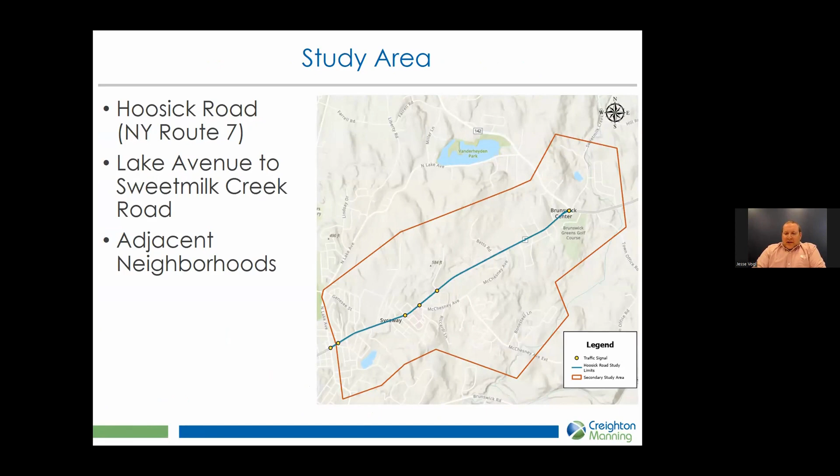We'll start here by taking a look at the study area. You can see in blue, our primary focus is the Hoosick Road Corridor, which is also New York Route 7, from Lake Avenue in the city of Troy to Sweetmilk Creek Road in the town of Brunswick. Also shown in red, we're looking at the adjacent neighborhoods to account for any potential spillover effects.

Here's the draft study purpose that was developed with the project team and study advisory committee. The purpose is generally to reduce traffic congestion, improve safety, and improve multi-modal mobility within the study area.

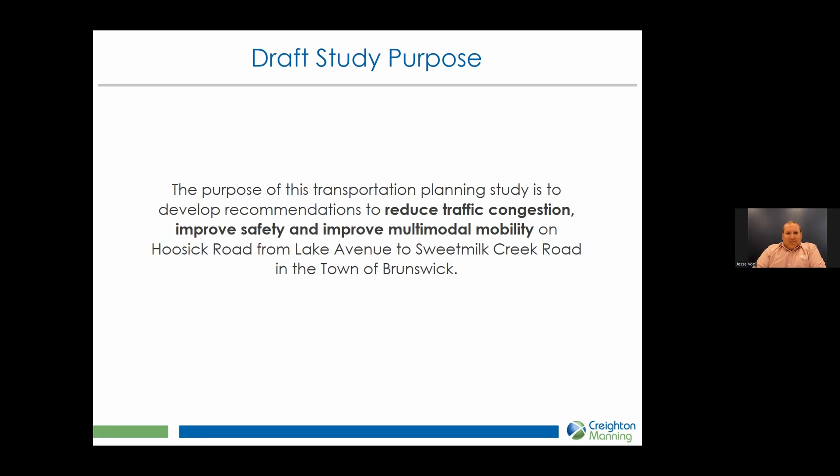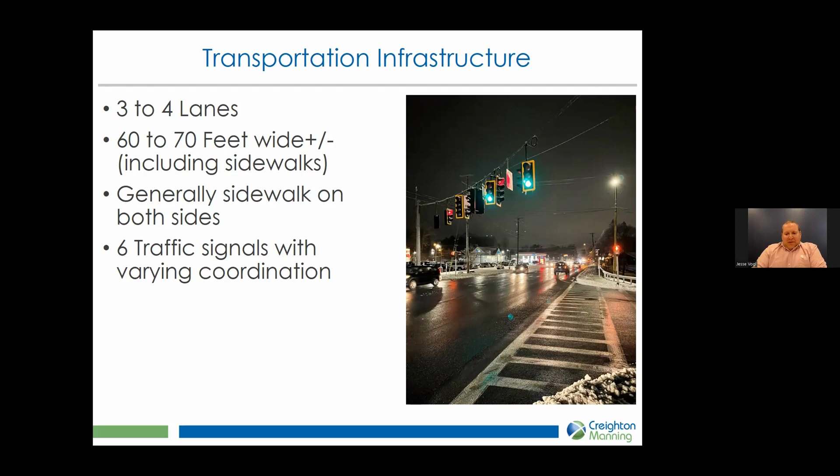Relative to Hoosick Road itself, it's 3 to 4 lanes, depending on where you are in the corridor, and ranges from 60 to 70 feet wide, including the sidewalks, which are generally present on both sides of the road. There are 6 traffic signals in the study area, and they have varying coordination parameters, meaning that they are timed to correspond to each other.

We conducted traffic counts for a week-long period on Hoosick Road in December to get an idea of when traffic was heaviest, to use in our modeling. We had 3 locations where we took counts, and Friday volumes were typically the highest, followed by weekdays.

The data also showed that traffic is heaviest in the western portion of the corridor and generally declines as you move to the east. Taking a closer look at the data we collected, we wanted to see what times of day had the highest traffic volumes.

Traffic generally increases around 6 a.m. and then stays relatively flat throughout the midday. Weekday traffic peaks in the early afternoon around 4 p.m., while Friday traffic peaks a bit earlier around noon.

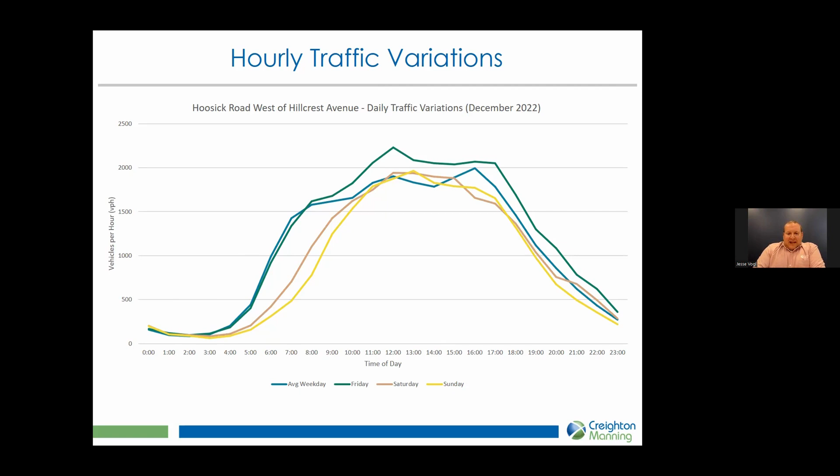This informed our future data collection of when we went and conducted intersection turning movement counts that fed our traffic model. Once we calibrated our existing traffic model, we then forecast traffic volumes to the year 2045 to account for potential growth.

We took a look at historic traffic trends, which showed that traffic has generally increased over the past decade. We coordinated with CDTC using their regional traffic model to develop background growth rate, and also accounted for any known and potential retail and residential developments that would affect traffic in the corridor to develop our 2045 traffic volumes that we use to model our future year.

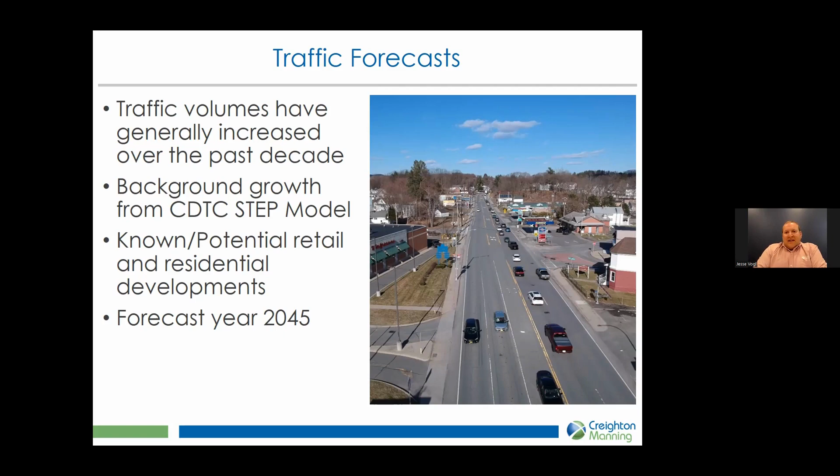We used that model to develop vehicle level of service, a letter grade from A to F that corresponds to how much delay drivers typically experience at an intersection. Levels of service A and B have less delay, while C and D are moderate, and E and F are long delays.

You can see on the right an image of the corridor showing the intersections with their delay. The color on the left shows the overall intersection operations, meaning every single approach, while the color on the right shows some of the side street or turning movement approaches.

You can see that the intersections on the western portion of the corridor generally have higher overall delays, while almost all intersections have some approaches operating at level of service E and F, whether it's the side street or a turning movement.

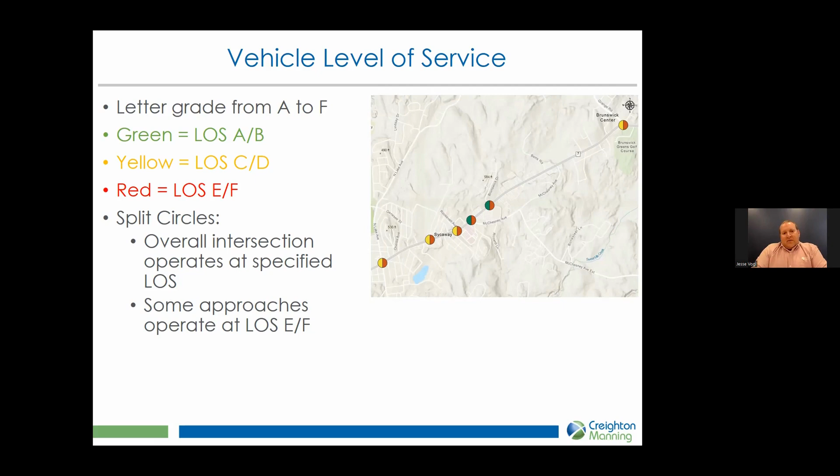In addition to level of service, we took a look at travel time reliability using data from the National Performance Management Research Dataset, or NPMRDS.

That data shows that the corridor does experience high levels of congestion, which occurs not only on weekdays, but also on Fridays and weekends. The data also confirmed that congestion is typically worse in the western portion of the corridor, and that traffic is slightly worse in the eastbound direction.

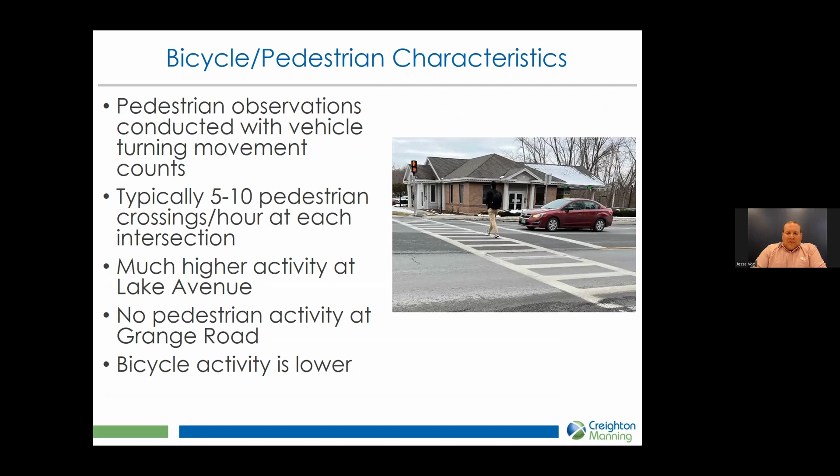Beyond the traffic conditions, we took a look at bicycle and pedestrian characteristics. We typically observed 5 to 10 pedestrian crossings per hour at each of the study intersections, although there was much higher activity at Lake Avenue in the city of Troy. Also, there was no pedestrian activity observed at Grange Road. In general, bicycle activity was lower, with only a few bicyclists observed traveling through the corridor.

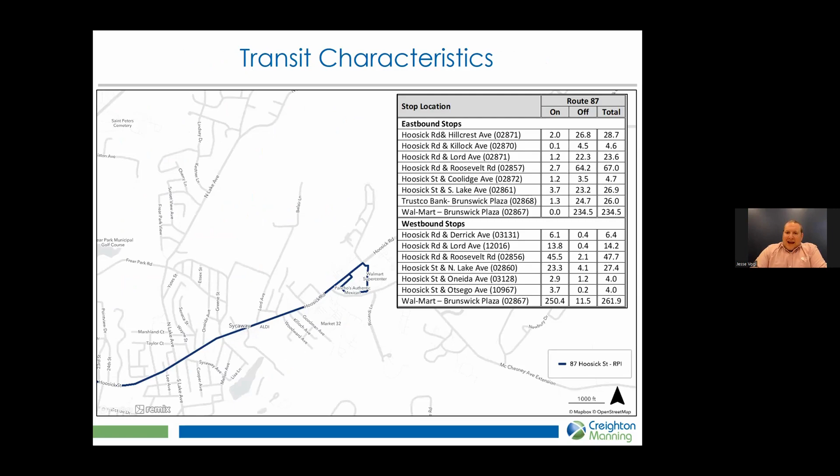Relative to public transit, CDTA operates Route 87 through the corridor, which serves downtown Troy, RPI, and Hoosick Road up to Walmart. You can see the ridership in the chart in the upper right corner, which shows that the Walmart stop, the end of the line, has the highest overall stop activity, but other stops in the corridor are also well used.

There were 9 pedestrian and bicycle crashes in the corridor, while the majority were collisions with motor vehicles. Relative to the collision type, rear ends were the most common collision type. There were also right angle crashes and overtaking crashes.

Interestingly, the overtaking crashes generally occurred on the western portion, just past the Lake Avenue intersection, where Hoosick Road transitions from 2 eastbound lanes to 1 eastbound lane.